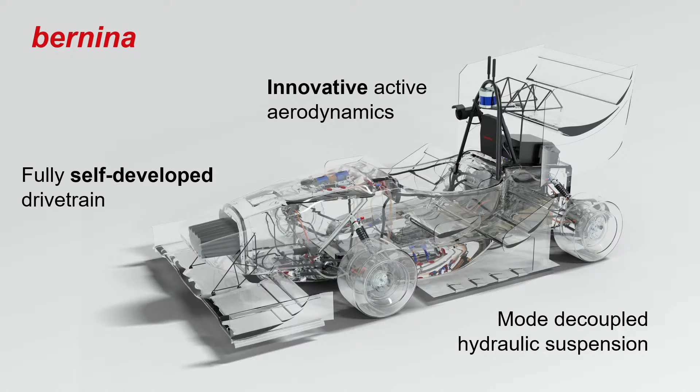Bernina features the strongest, most powerful motors in AMZ history. To bring this power onto the racetrack, we need optimal traction, which was achieved by innovations in active aerodynamics. And AMZ would not be AMZ if we did not integrate our in-house developed mode-decoupled hydraulic suspension alongside a fully self-developed drivetrain.

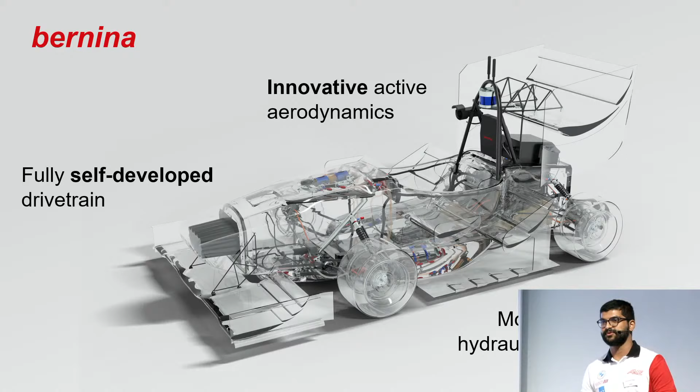Before I get into more details, I want to tell a small anecdote about our manufacturing. As any good engineer would do, our chassis team did a great job of documenting their work in pictures. After long weeks of day and night shifts, we wanted to look back at the progress we made, when we noticed that the photos tag the locations where they are taken from.

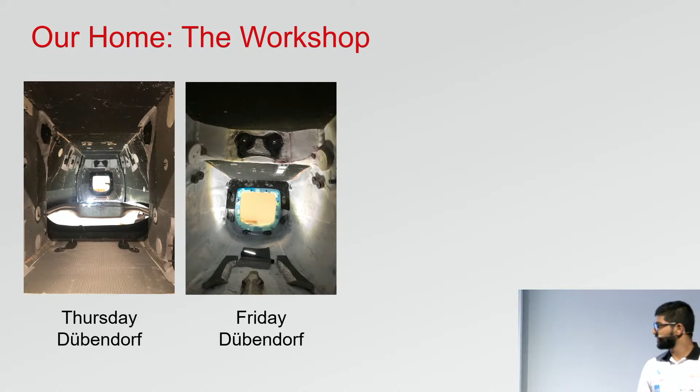So on Thursday, the phone said that we worked from Dübendorf, our workshop. On Friday as well, as usual, we worked from our workshop in Dübendorf. And since we don't rest on weekends, we once again worked from Dübendorf on Saturdays. But on Sundays, the phone thought we were at home. Not only did our friends and family believe that we lived at the workshop, no, our phones realized that the workshop was our home.

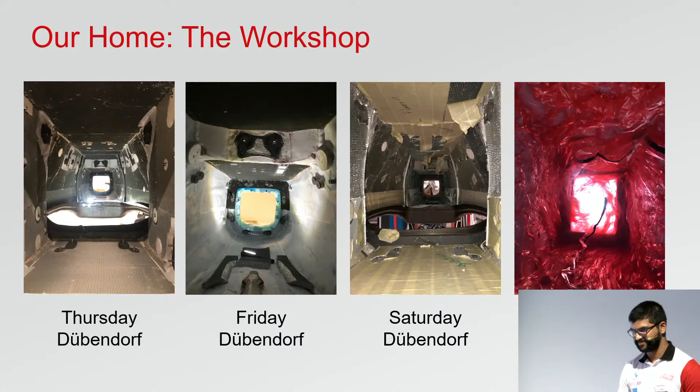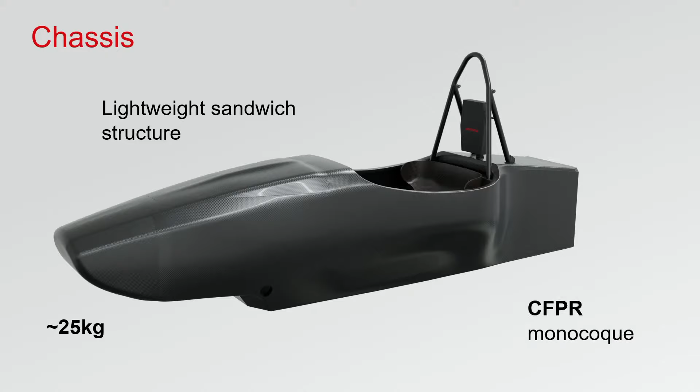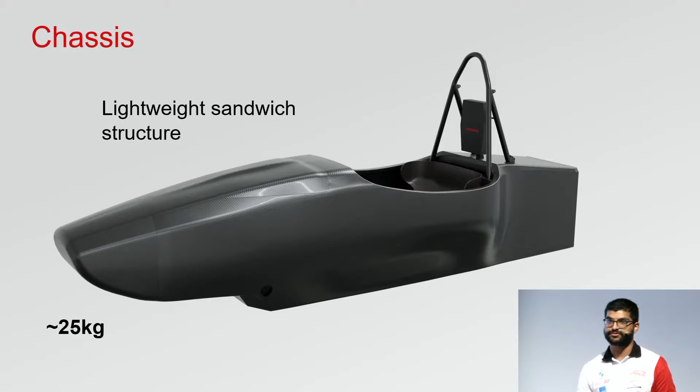But only through that effort, we were able to build the newest car. It has a full CFRP monocoque, it is handmade, weighs only 25 kilograms, and does not compromise in torsional stiffness. This is achieved by a lightweight sandwich structure and an aluminum honeycomb core.

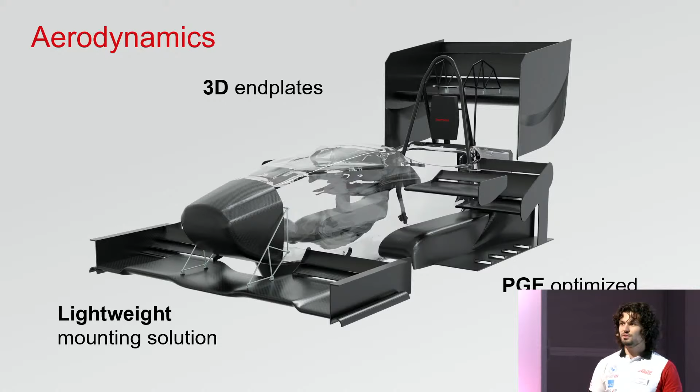In the aerodynamics department, we innovated quite much this year. Not only did we build 3D end plates and a lightweight mounting solution, no, we also optimized the car for the so-called powered ground effect. So, in Formula Student, there's this running gag of people saying, wings don't work. Our aero department took that a bit too literally and started innovating with active aerodynamics.

So, we decided to talk a bit more about this. To sum it up, we have two fans which are generating a vacuum-like zone under the car by accelerating the air to over 160 kilometers per hour. Two 4.5 kilowatt motors are bringing us an additional 150% of downforce.

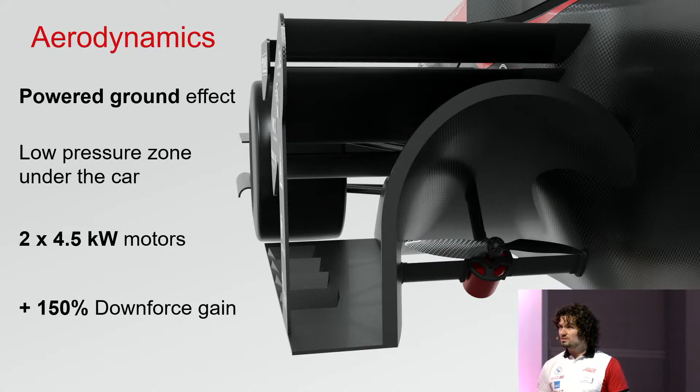The biggest advantage of this system is that we can generate downforce from standstill, and thus accelerate even faster and reduce lap time drastically.

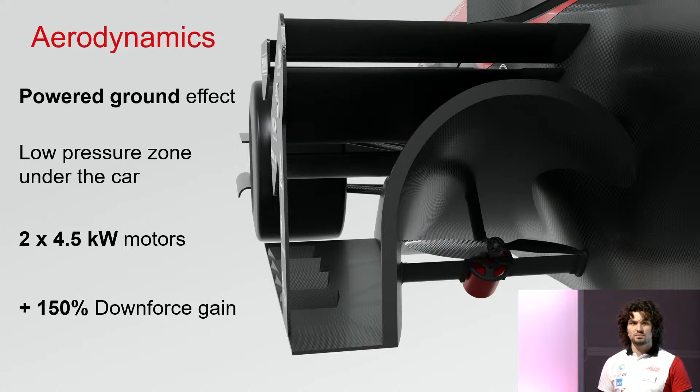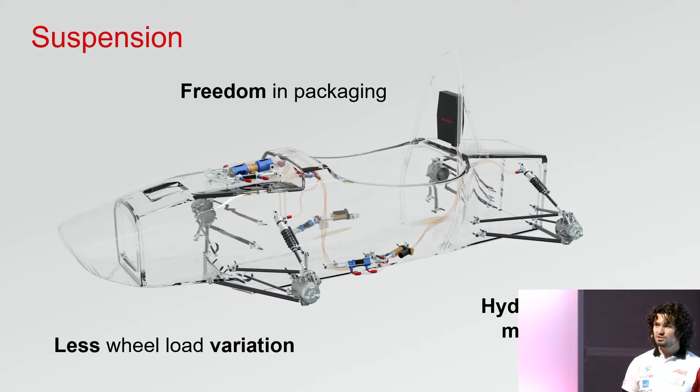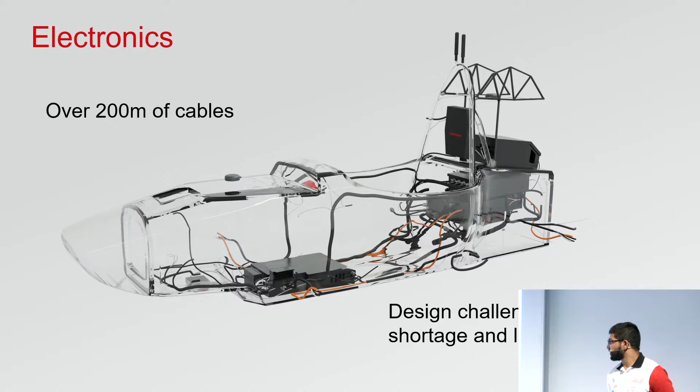I want to tell you about one key highlight of their work package, the Accumulator Management System, in short AMS. The AMS monitors cell voltages and cell temperatures to ensure a safe operating state of the accumulator.

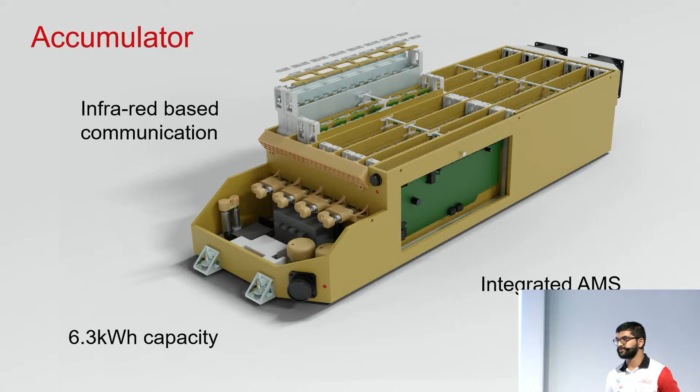In the high voltage accumulator, the AMS is directly mounted onto the cells and communicates via infrared to decouple it from any noise. In contrast to that is the PGE AMS. It is made for a low voltage system which can handle high currents to ensure enough power for the active aerodynamics.

After telling you a little bit about the framework of the car, I would like to continue with the drivetrain. The first part of our traction system is the accumulator. It is also the heaviest part of our car, weighing roughly 40 kilograms with a capacity of 6.3 kilowatt hours.

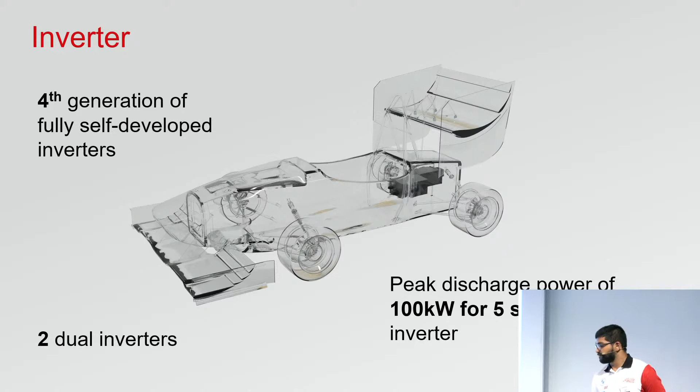We have to transform the direct current of the accumulator into alternating current. This is done in the fourth generation of our self-developed inverters, the i4s. They have a peak discharge power of 100 kilowatts for 5 seconds.

We opted for a dual inverter system this year, meaning that each inverter powers one axle of the car. This allows us to have more packaging freedom and less design constraints.

The inverters are not only very powerful, they also allow for a very precise control of the motors. This is achieved with a high switching frequency in our state-of-the-art silicon carbide semiconductor modules. The inverters communicate once again with optical fiber with the motors to decouple it from any noise.

Ilya will tell you more about the motors now.

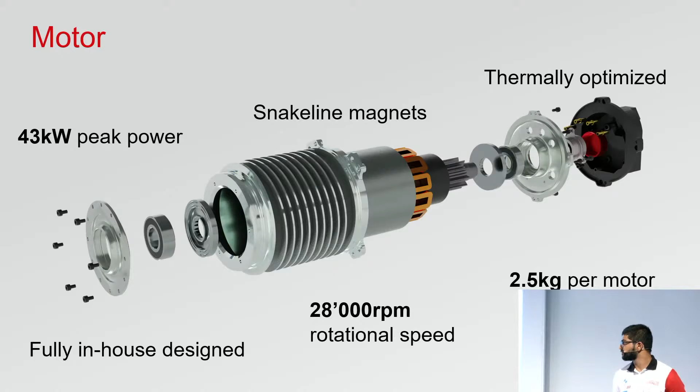So yes, let's talk about the heart of our car, the motors. Bernina features our 11th generation self-developed motors, the so-called M11. With its 43 kilowatts, it's the strongest motor that AMZ has ever built.

Furthermore, we are using Snakeline magnets to reduce eddy currents in the rotors and therefore lower the temperature there. The mass of the motor is 2.5 kilograms and it reaches a speed of up to 28,000 RPMs.

Our car features 4 of these motors, one in each wheel, which combined with the gearbox provide over 1,000 Newton meters of torque to the car.

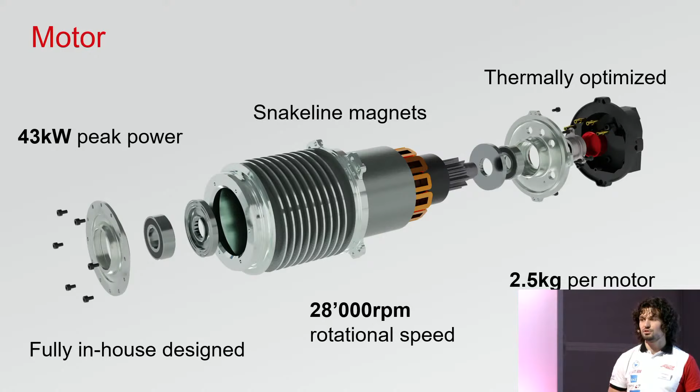Our wheel packaging consists of 10-inch tires with self-made carbon fiber rims. This carbon fiber rim is then mounted onto the milled wheel hub, which has an integrated planetary gearbox.

Our highlight, though, is most definitely the SLM-printed, topology-optimized upright. Topology optimization helps to reduce weight while preserving structural integrity. It is an aluminum structure which transfers the loads from the road into our chassis and suspension.

Overall, the wheel packaging consists of many multifunctional, lightweight parts which help to reduce lap time once again.

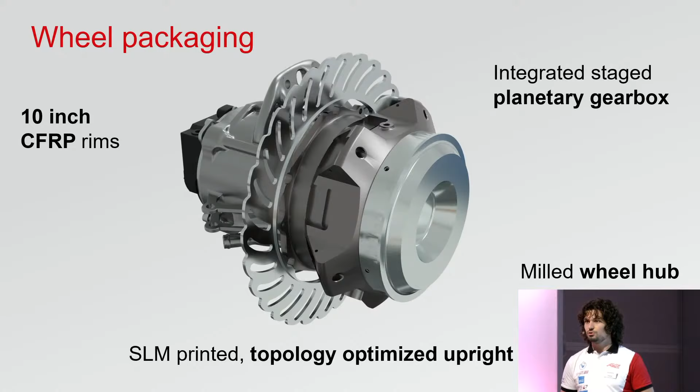And really, everything from there worked perfectly, except that it didn't. With only 8 focus students this year, we experienced a massive lack of manpower, of course. And delays in the manufacturing due to the high demand this year were not helping either. And finally, we are still just students who make mistakes and thus generate even more delays. But it's exactly these mistakes which help us grow into better engineers.

So, to sum it up, we had to compensate the delays by pushing back the testing phase. But the project is not over yet. We are still working day and night to finalize Bernina, go to the competitions, and win some races. Working in such a passionate team where the dedication is so high is truly rewarding.

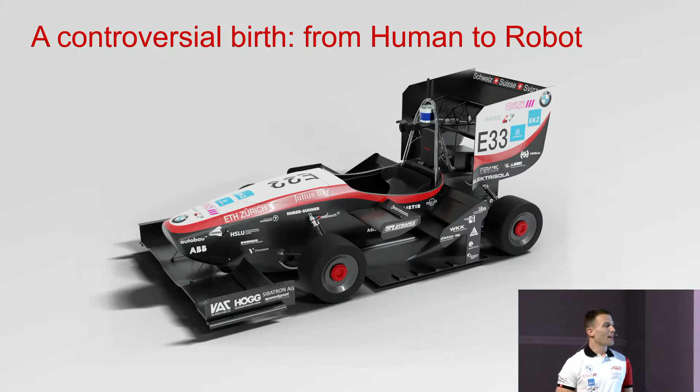And I want to thank Ilya and Goranj for showing us the manufacturing process, which, as you have heard, was not easy this year. But actually, the challenges started even before the manufacturing, in the design phase, because this is the first year that we're building just one car, designed from day zero to be driven both manually and autonomously.

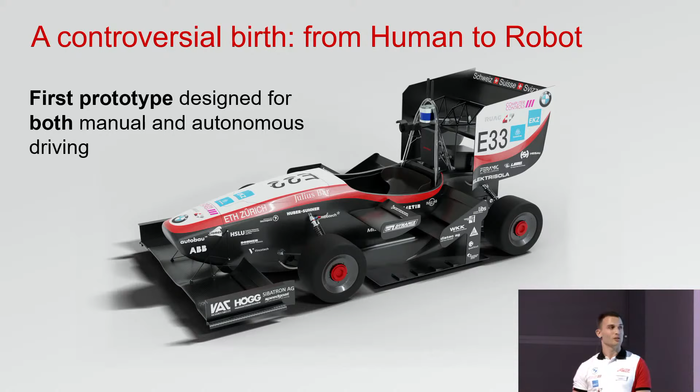So we had a few challenges to overcome, and critical factors were weight efficiency, because a manually driven car cannot be fast if it is not light. And so we had to reduce our setup, both from sensor and computation point of view, and also think about the positioning of our hardware, because we had to take into consideration the human driver.

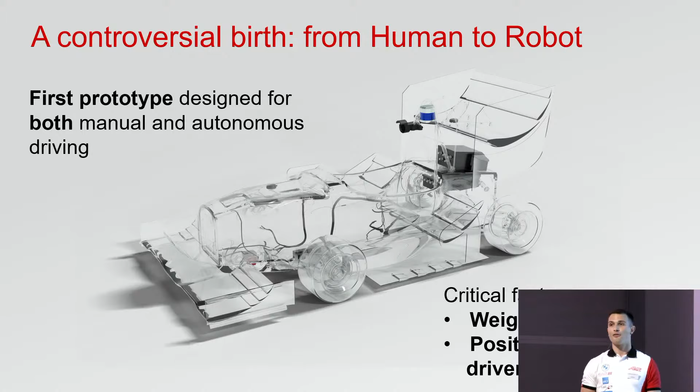So I will give now the word to my teammate Manolis, which will walk you through the first sense of the car, which is vision.

Hello, everyone. My name is Manolis, and I'm perception engineer at AMZ. I will start by talking a bit about the way that Bernina perceives the environment visually, the eyes of Bernina.

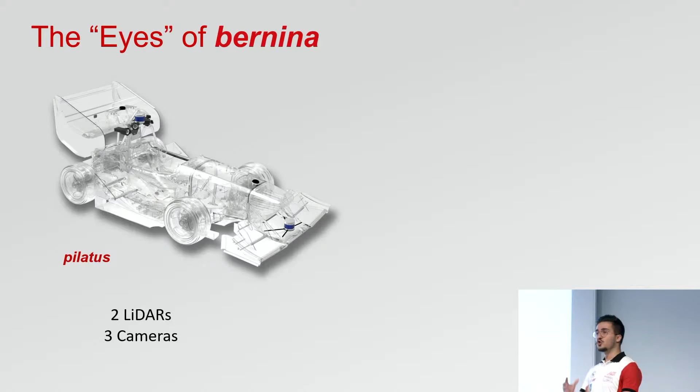As Alessandro mentioned, one of the main challenges we faced this year was to minimize the overall weight of our car. As you can see on the slide, that is our old car Pilatus, and the perception setup was comprised of 2 LiDARs and 3 cameras, totaling 5 sensors. This year, we moved to Bernina, and we decided to change this setup and just put 1 LiDAR and 1 camera, minimizing the overall setup.

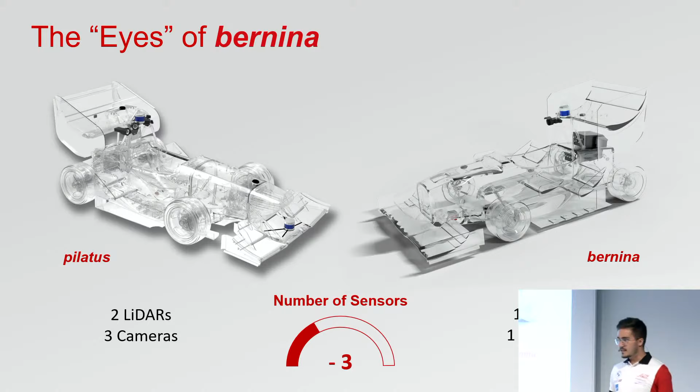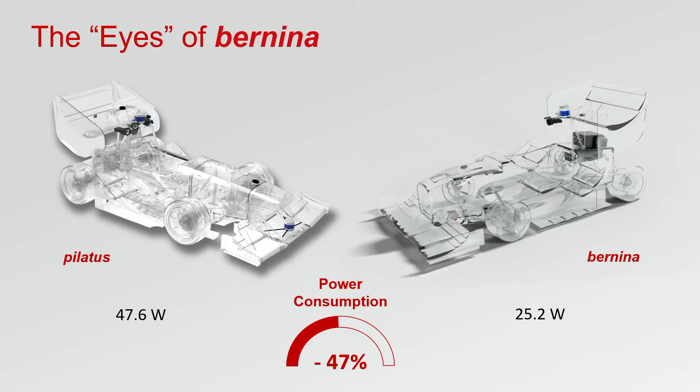This led to 3 less sensors, which at the same time reduced the overall weight of our sensor setup by 50%, going from 3.8 kilos to just 1.9 kilos. At the same time, this reduction of the sensors also reduced the power rating of our perception setup by almost 50%, accurately speaking, 47%.

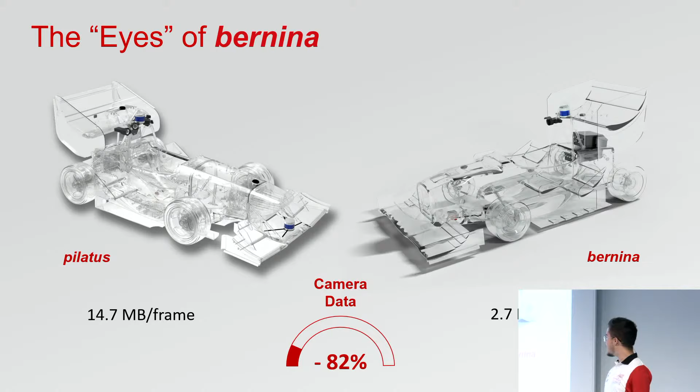At the same time, because we reduced our total cameras from 3 to just 1, we also reduced the data that we had to process. So from just 14.7 megabytes per image frame, we went by changing to just 1 camera and at the same time cropping our image to 2.7 megabytes per frame, totaling a reduction of 82%.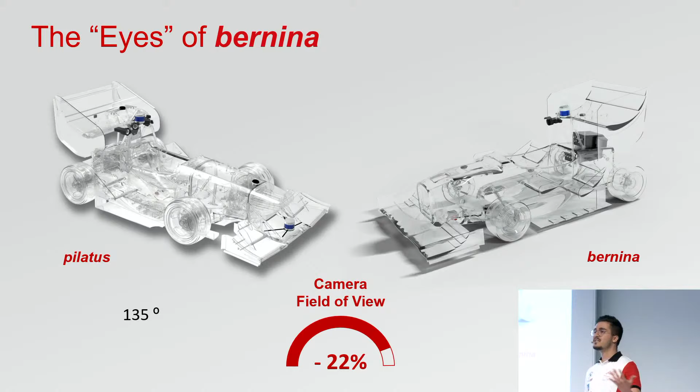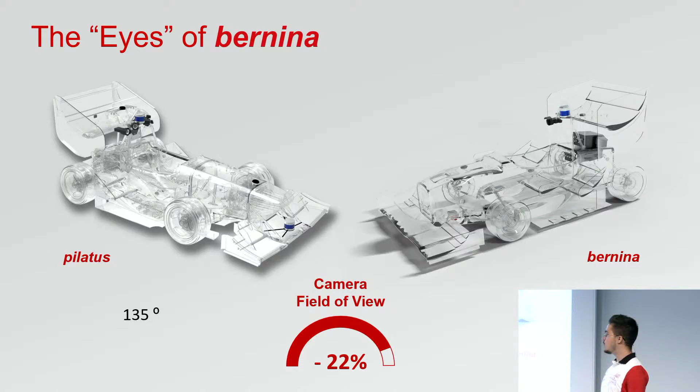However, nothing comes for free. So in order to have all these improvements, we had to reduce also the overall field of view of our camera, which was reduced by 22%. This we tried to tackle by changing the overall architecture of our perception pipeline, which you will see just now.

This block essentially fuses the data from the two sensors together. For this, we use a neural network for our camera, which we combine with certain sensor fusion heuristic filters in order to optimally combine the two types of data.

However, we have a constraint: the field of view. More specifically, we have just 105 degrees field of view from both sensors. So to improve that, we decided to use another important building block by detecting the cones from the LiDAR, and do another clever step of fusing the two detections in a later fashion in order to get our final output, which is the cone position, the colors, and all the probabilities.

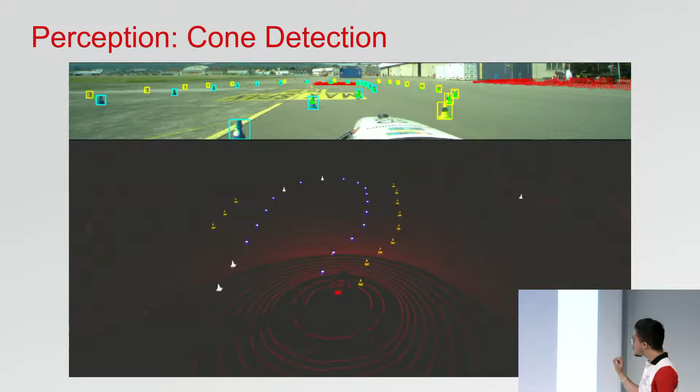This picture is then transformed into world, as you can see at the bottom of this video, which is essentially what Bernina, our car, will understand the world to look like. Now that you have an idea of how we see the environment, I will give the word back to Alessandro to describe the rest of the predictions and estimations we need to make.

So Bernina does not only have eyes, it also has spatial and body awareness. We achieve that with a broad set of sensors on the car. The first two are the INS and the IMU, the inertial navigation sensor and the inertial measurement unit. Through this, we get acceleration and yaw rate, and we also synchronize the sensors from a time point of view.

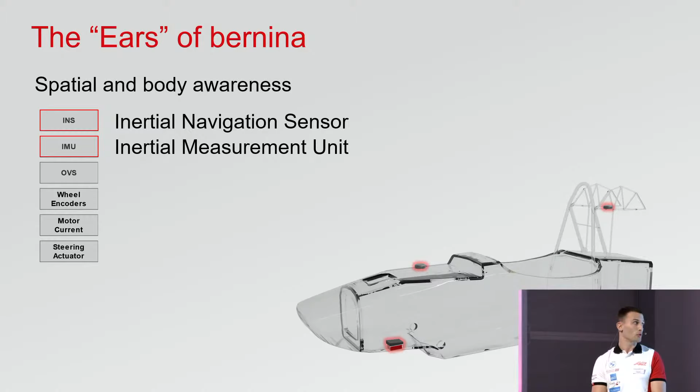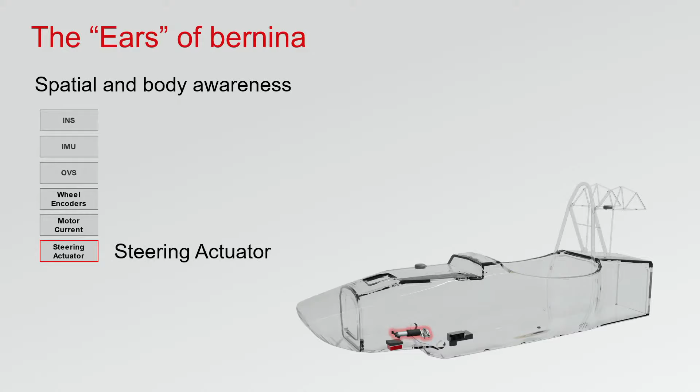Then we have the optical velocity sensors, which give us accurate lateral and longitudinal velocity measurements. Finally, we have the steering actuator, from which we take the steering angle. All these sensors, together with the wheel speed from the wheel encoders, and the motor current, feed into velocity estimation, the first step of our estimation pipeline.

This block is very important because it gives us a very accurate estimate of the velocity we are at, to pass to mapping, control, and grip estimation.

Speaking of grip estimation, this is one highlight of this year. It was never done before in the history of AMZ, and it allows us to run at the limit of the grip that the car has on the ground.

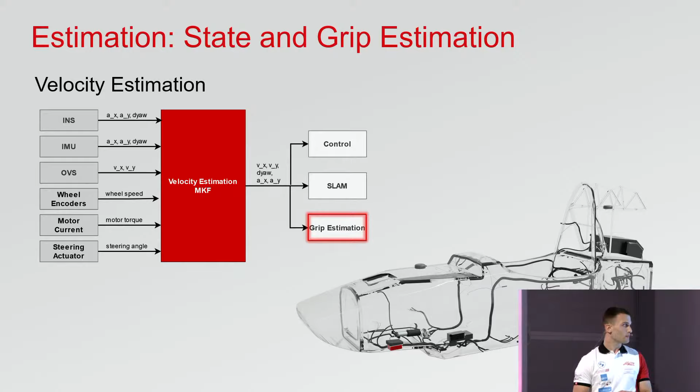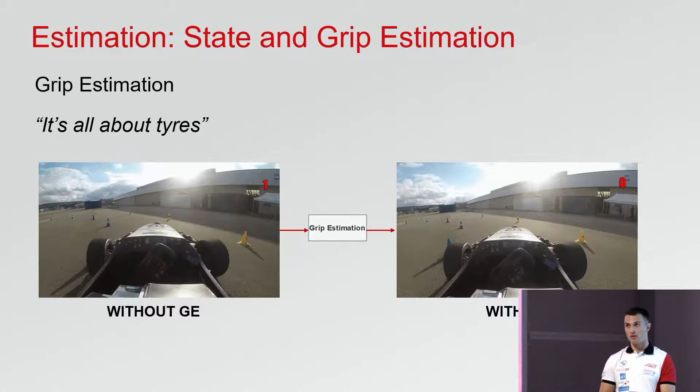Estimation is also about mapping, which we achieve through our SLAM package, standing for Simultaneous Localization and Mapping. This gives us a global map of the track and localizes the car inside it so we know where we are. An important part of the SLAM pipeline this year, since we deal with two kinds of output from perception, is data association.

So the colored cones and the uncolored ones need to be matched. When the cones are seen by the main pipeline, they get the color they have.

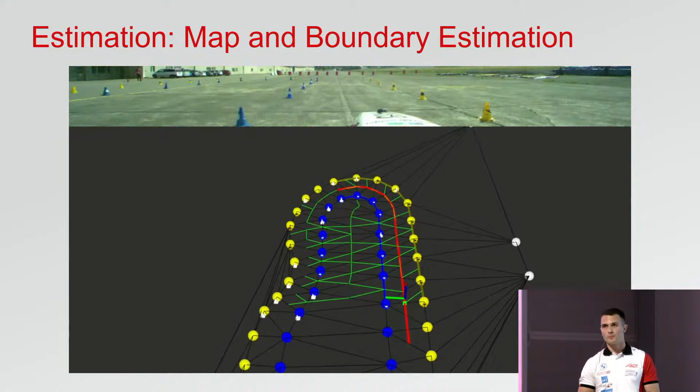So you've seen how we estimate the map and the path, but now we need to control the car. I will give back to Manolis to talk about control.

Now that we have seen the environment around us and built our map, we need to think of how we move on. That happens in the brain of Bernina.

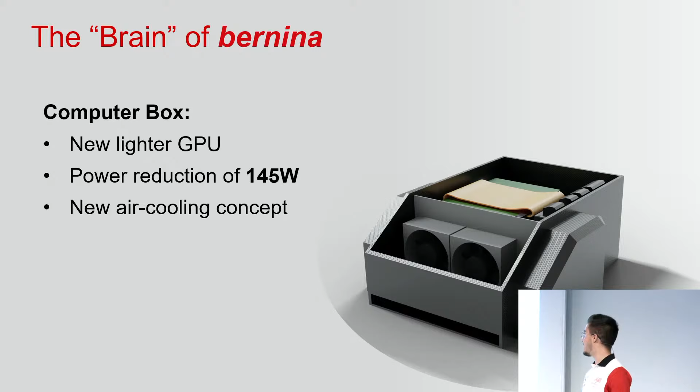The brain of Bernina consists of two main parts. First, it's our custom-made computer box. This year we made some changes in the computer box: we integrated a new, lighter GPU to reduce the overall power consumption, which was successfully reduced by 145 watts.

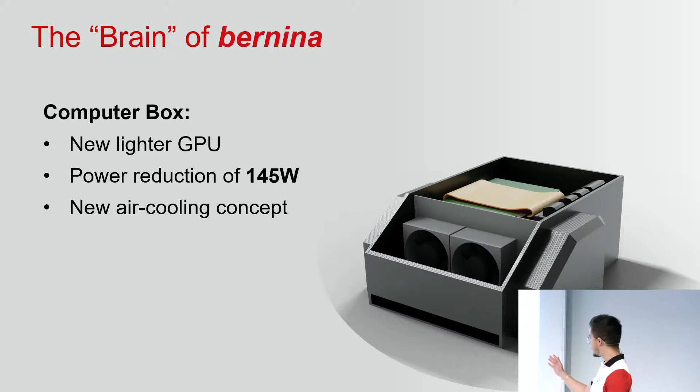At the same time, a new addition this year was moving from a water cooling system, previously used in our cars, into a new custom-made air cooling concept. The second part of our brain is called the electronic control unit.

This is a fast computer which essentially controls all of the electronics of the car, and at the same time performs key operations such as traction control, torque vectoring, and estimates the velocity of the car that we need.

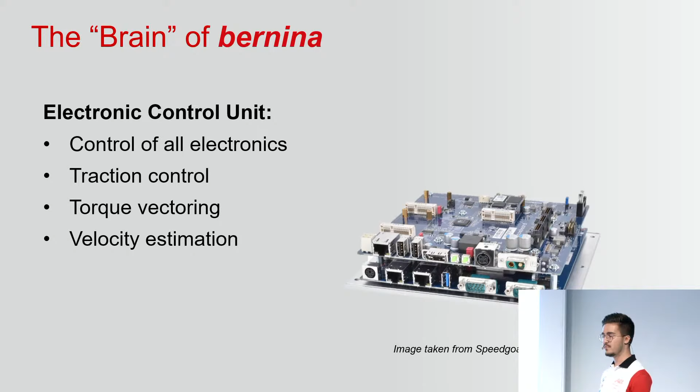So now we thought, and we did the thinking process, we need to actually act, and that's where control comes in. At AMZ, the overall architecture of our control pipeline is split into two main parts.

First, we have high-level control, or HLC, which uses model predictive controllers, essentially a numerical optimization type of controller, in order to produce the optimal path that we want the car to follow.

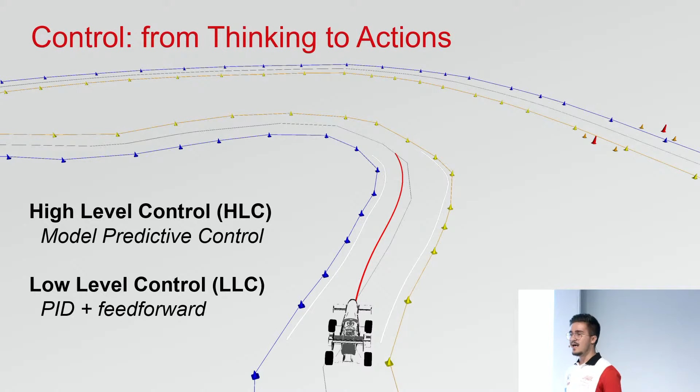As soon as the optimal path is there, shown in red, we move on to the second part of our control pipeline, the low-level control, or LLC. For this, we use a combination of PID controllers and feed-forward controllers, which are used to track this path as fast as possible.

The benefits of such a combined architecture is that we can achieve elaborate motion planning through model predictive controllers, while at the same time achieve high-frequency tracking of our path, and high-frequency traction control and torque vectoring.

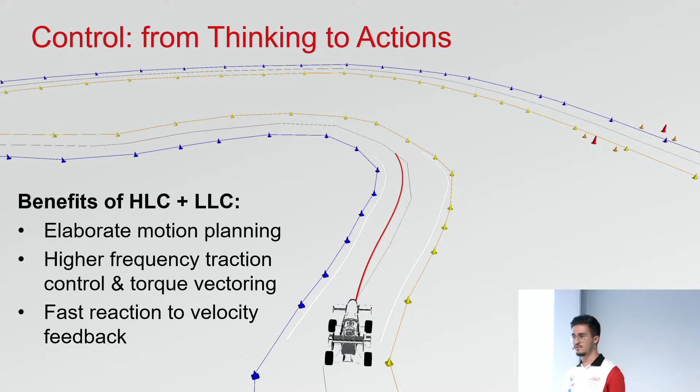This leads to a fast reaction to our velocity estimation and brings us to the main improvements of control for this year, which I will highlight next.

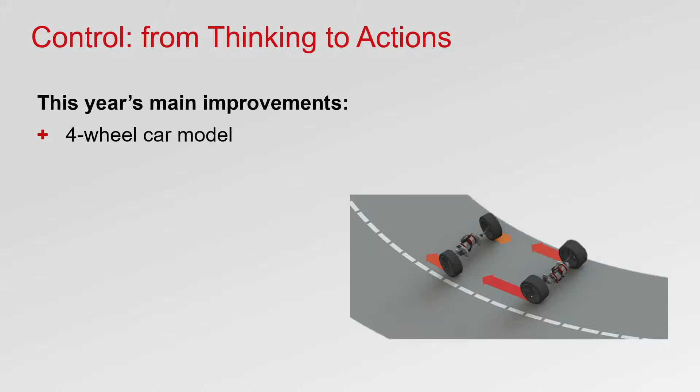First, we changed the model that we used for our car. Last year we were using a two-wheel model, and this year we decided to model our car more precisely by moving to a four-wheel car model and independently controlling each wheel.

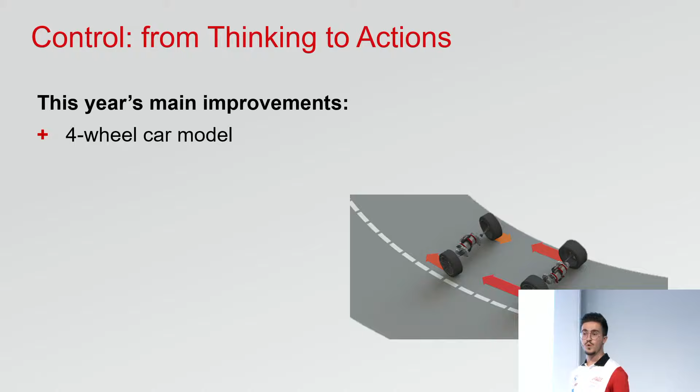At the same time, we integrated, as Alessandro mentioned before, grip estimation feedback into our control loop. This overall will manage to minimize the overall model mismatch and make our model as close as possible to the dynamics of the real car.

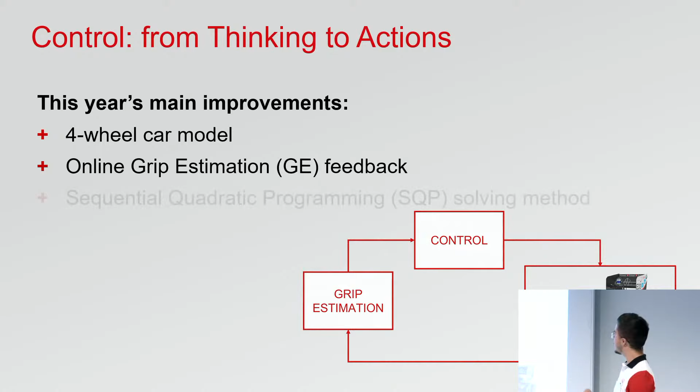Last but not least, as soon as we moved to a more precise but complicated model, we also needed to change the way that we solve our optimization problem. For this, we decided to change the solving method and move to a so-called SQP method.

So with this, we can move on and see the controller demonstrated live. At the top, you can see the view of the car through the camera, and at the bottom you see the...

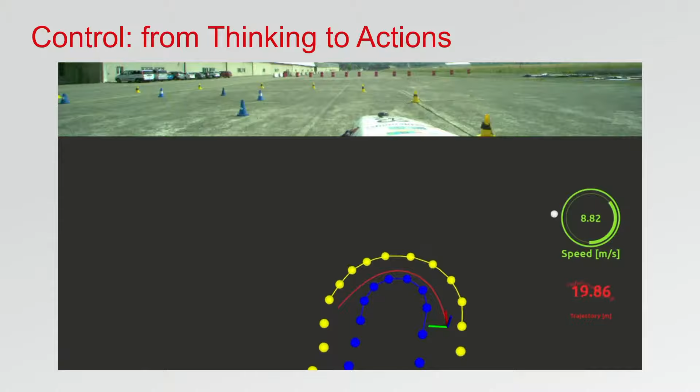actual path that it's generated and is followed by the car. At the right-hand side, you see the overall speed of the car and also the length of the generated trajectory that we want to follow.

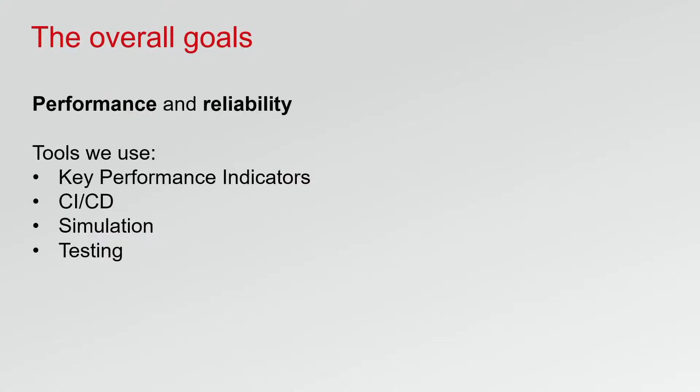And now that you have seen the whole pipeline, let's move back to Alessandro for some closing statements. So you now know about our full pipeline, but what are the goals we developed it for? This year, the goals were two.

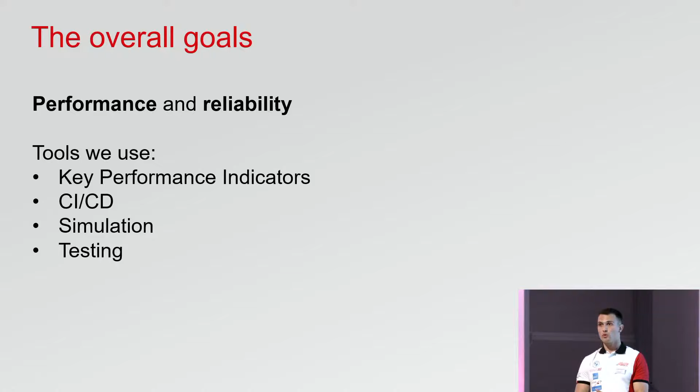Keeping the high performance we have always achieved, but at the same time improving reliability of our algorithms. We have some tools we use for that. First is key performance indicators - metrics and graphs that we use to evaluate what we implement.

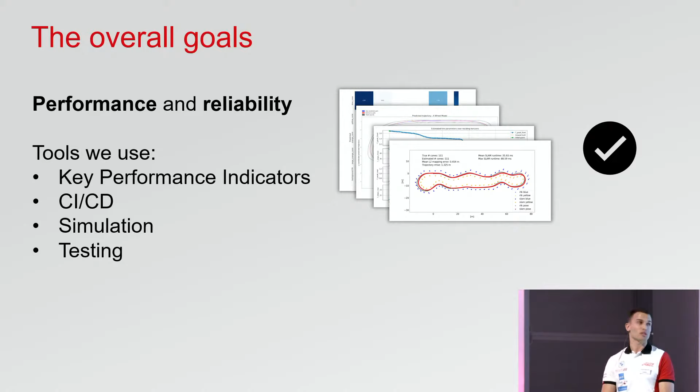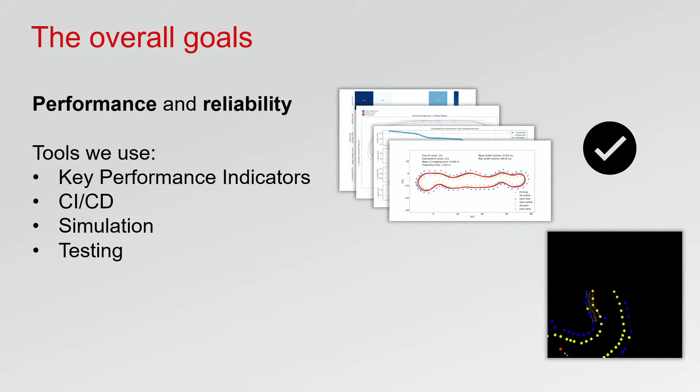As soon as the checks are completed automatically in our continuous integration, we can move to simulation. We simulate the full pipeline to understand if the features we are developing are going in the right way, making improvements and not going back. After simulating, we want to see it on the real car, so we go testing. You will have an overview of this in the auto show after.

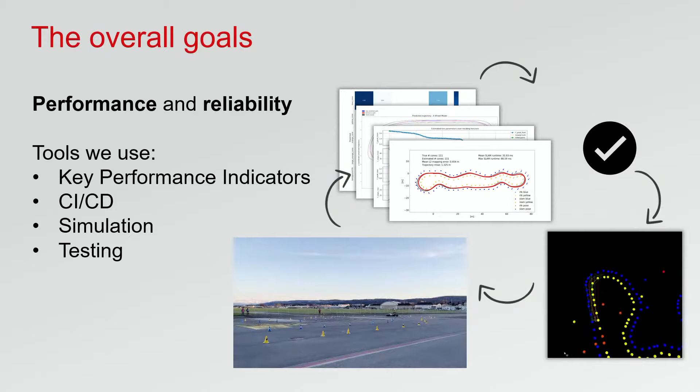A big thanks to Ilya, Garange, Alessandro, and Manolis for introducing us to Bernina. I can't wait to see our newest race car hitting the tracks all over Europe to show if the newly developed concepts will bring the decisive advantage. For the team, I am personally so proud of what they have accomplished. Looking a few months back, their learning really is put into perspective. A technical problem, 5 minutes later, a bunch of solutions is already discussed and evaluated. Everyone knows what to do to reach that common goal of getting Bernina ready to race, how to communicate efficiently, or how to organize oneself.

I want to come back to something especially important for a project like ours: the support from all our sponsors and partners that enables a project like this. They mill, they turn, they print, they paint for us. They provide vital financial resources and help us out with questions, motivate us with events, and invite us to exhibitions and keynotes so that we can show to the grand public what we do. Let's give a big applause to them.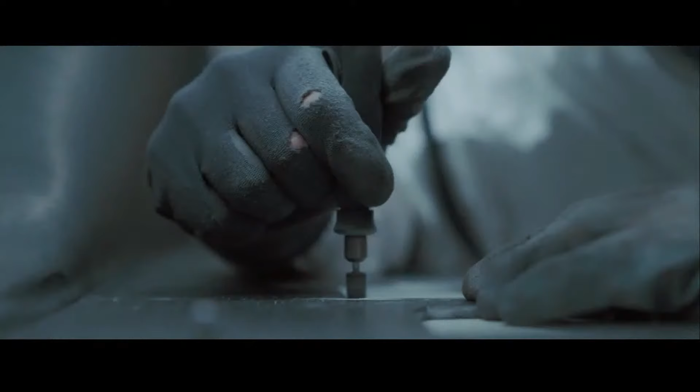AMZ in 3 words for me is team, perspective, and growth. AMZ in 3 words for me is passion, creativity, and team spirit. Dedication, passion, and privilege. It's very, very challenging, but at the same time very exciting, and you learn really a lot. My name is Karan Tiwari, and I'm part of the inverter module. If I would have to describe AMZ in 3 words, I would choose unique, challenging, and exciting. Team, effort, and success. Because we would not be doing any of this if we weren't a team, and there is a lot of effort involved in order to succeed.